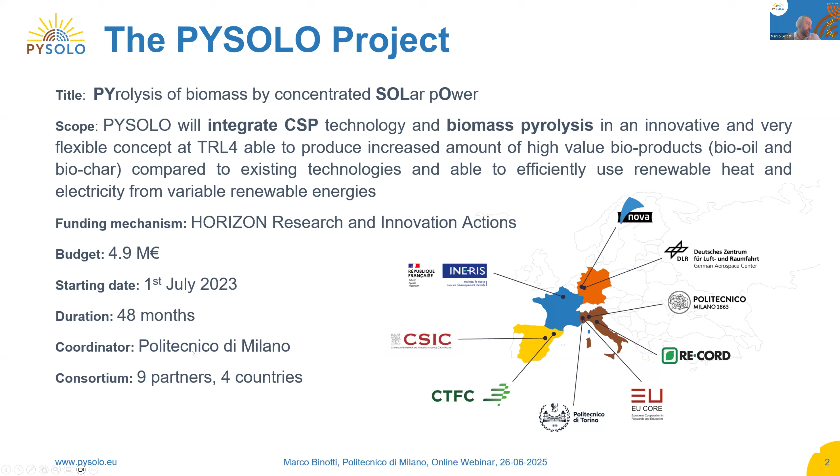My duty here is to provide the audience a short introduction about the PYSOLO project, and the framework for the subsequent talks, which will be very interesting about pyrolysis and solar concentrating systems. The PYSOLO acronym stands for Pyrolysis of Biomass by Concentrated Solar Power, with the scope of integrating CSP technology - concentrating solar power technology - with biomass pyrolysis in an innovative system, which I will show shortly. The project started about 2 years ago and will last 4 years, so we are halfway through, meaning we have started the experimental activity, as you will see. The consortium is made of 9 partners from 4 countries, as shown here, with coordination done by Politecnico di Milano.

So what's the idea under the PYSOLO project? Pyrolysis is a process in which you have thermal degradation of biomass in a temperature range between 250 and 700 degrees, in an environment without any oxidizing agent. The products of this degradation are bio-oil, pyrogas, and char - a liquid, a gas, and basically solid carbon. This process is endothermic, so it requires heat. How is the heat typically provided to this process? Basically, the biomass is dried, then you have the pyrolysis, and after the pyrolysis, you have separation - for example, of the solid carbon particles, the char, together with the particulate carrier. You have combustion, and the combustion of this char provides heat to the particles that finally provide heat to the pyrolysis system.

So this represents an inefficient step because we are using part of the valuable biogenic carbon produced just for combustion, with CO2 emission. Of course, it's carbon neutral emission, but in any case we are reducing the carbon efficiency of the process. Then what's the idea that moved us to the PYSOLO concept?

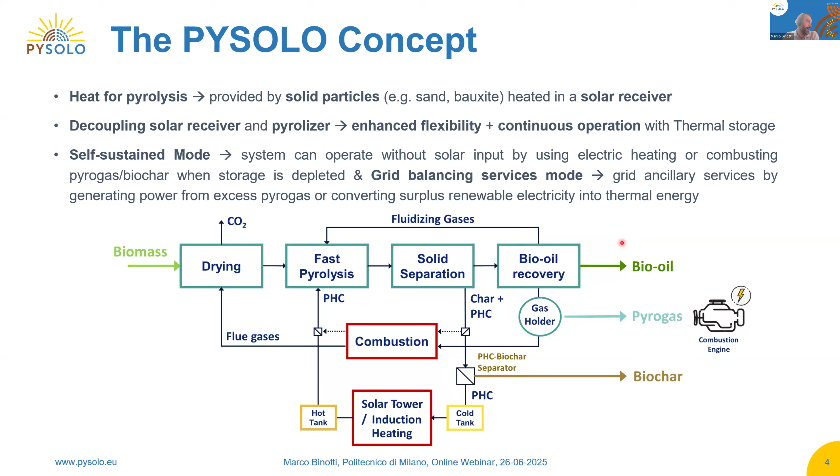And in case, pyrogas. So what we will do in the project, we will test different particulate carriers that should be optimized both for the operation on the pyrolysis and on the receiver side.

We will test the key components of the system at TRL4, which means that we are testing not the integrated system, but each system per se, but with an eye on the entire optimization of the system.

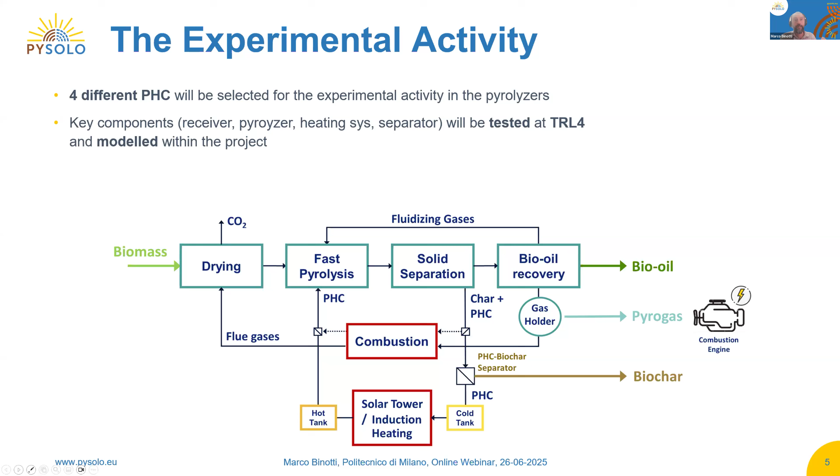In particular, we will test the auger and the fluidized bed pyrolyzer, two different pyrolyzers, in two sites at RE-CORD and CSIC. Then we will test the solar receiver at DLR. It's a rotary kiln type of receiver.

We will test the induction heating and the separation system. Of course, it's also important to separate the valuable product from the particulate carrier itself.

Apart from this experimental campaign, we will have, of course, modeling activity supporting each component's study and development. And we will have a system analysis at system level in terms of techno-economic assessment, life cycle assessment, and risk analysis that will be performed within the project.

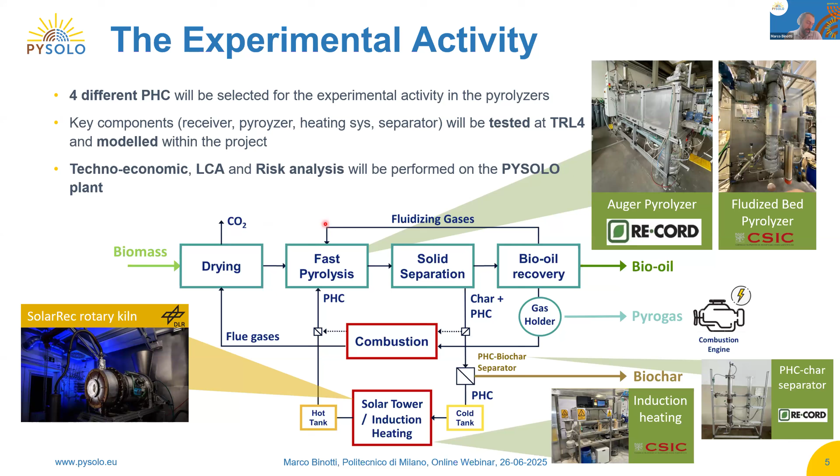So here it's briefly reported the objectives of this project. The objective is the validation at TRL4 of the solar pyrolysis process, demonstrating basically the key components, and then we have objectives for each of the components.

Objectives for the receiver in terms of operating hour and efficiency. We have a specific objective for the pyrolysis unit with specific target.

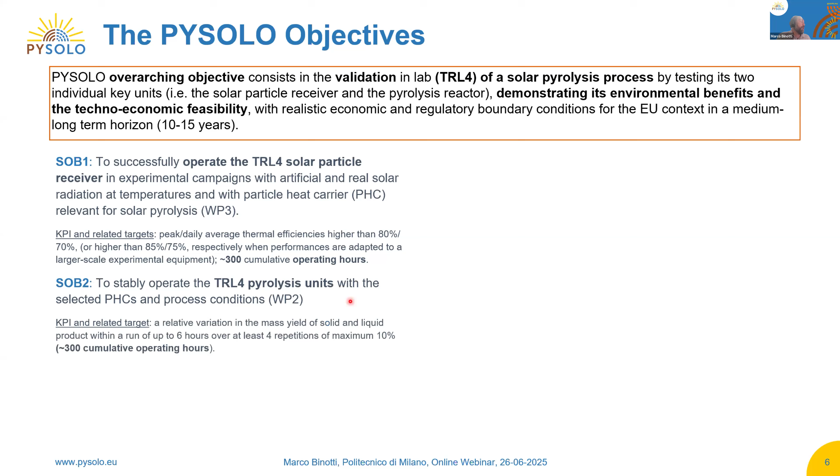We have objective for the particle char separator unit, for the induction heating with KPIs and target, and for the overall system analysis that are here reported, but I will not go into the detail of this as the presentation will be made available for you.

In the end, what we want to demonstrate is that this system is a full-scale system that can be a negative emission system on LCA basis. So not only carbon neutral, but given the fact that we are producing char, the overall carbon balance will be negative.

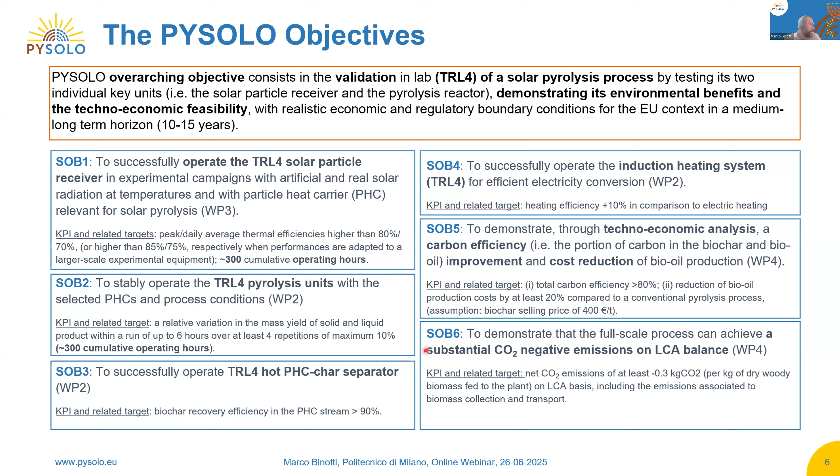That was a very short introduction because this was not the most interesting and relevant scientific part of the talk, which is, of course, part of the remaining webinar with all the experts from the PYSOLO consortium.

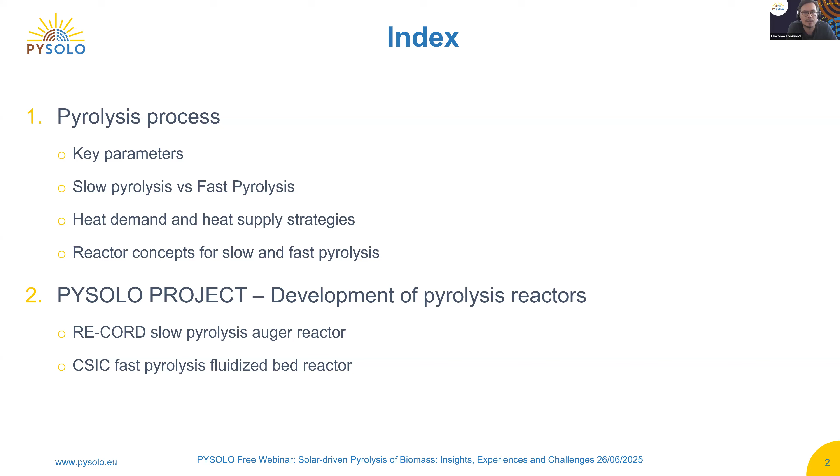Pyrolysis is a well-known endothermic process generally carried out in an inert or slightly oxidizing atmosphere, in a temperature range of 400 to 650 degrees. The main products are a carbonaceous solid, the biochar; a mixture of non-condensable gases, mainly carbon monoxide, carbon dioxide, methane, hydrogen, and other hydrocarbons with higher carbon atoms; and finally condensable vapors, a complex mixture of organic compounds originating from the thermal fragmentation of the biomass constituents, which when condensed form the well-known bio-oil.

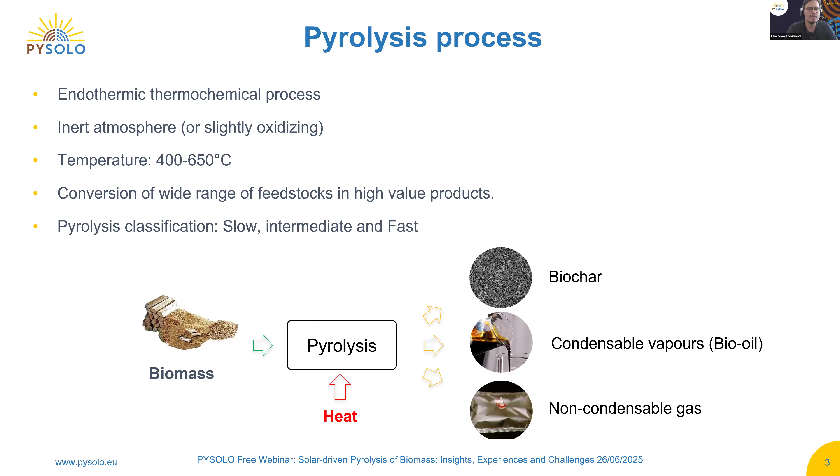Pyrolysis is generally classified into slow, intermediate, and fast pyrolysis according to the operating parameters. The most important parameters are temperature, the solid and vapor residence time, the heating rate, and biomass properties such as size, shape, and chemical-physical composition, and finally the moisture content, which affect the energy requirement for the process.

In intermediate pyrolysis, the heating rate is lower than in fast pyrolysis, and the residence time of the feedstock can be in the order of minutes. These operating conditions lead to much lower liquid yield compared to fast pyrolysis, and a higher yield of char and gas. In general, intermediate pyrolysis is adopted to balance the three co-products.

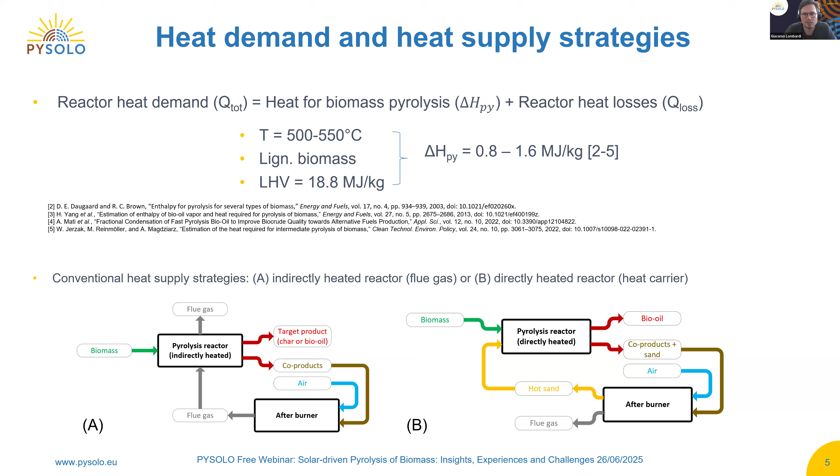The first method is generally adopted in slow pyrolysis, while the second is used in fast pyrolysis reactors. The most common fast pyrolysis reactors are bubbling and circulating fluidized bed, the rotating cone, and the directly heated auger reactor. The essential characteristics for such reactors are very rapid heating of the biomass, an operating temperature around 500 degrees, and rapid quenching of the produced vapors.

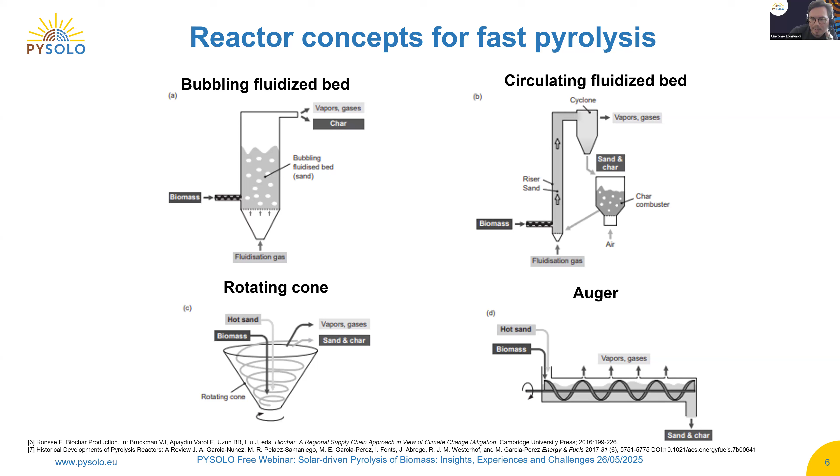In most of these systems, heat is internally provided via a solid heat carrier. The intensive mixing of biomass and heat carrier intensifies the heating rate, which leads to very high bio-oil production, up to 70%. In general, fast pyrolysis systems require small size biomass to match the heating rate required for bio-oil production.

Slow pyrolysis is applied from rudimentary batch kilns up to continuous industrial systems. In general, slow pyrolysis reactors tend to be simpler compared to fast pyrolysis reactors, since they are generally carried out with slow heating rate and high solid residence time.

Nowadays, traditional kilns have been replaced by continuous industrial reactors such as retort, auger, and rotary kiln. Retorts are indirectly heated fixed bed reactors designed to handle wood logs and are not suitable for small size biomass such as agricultural and forest residues. Whereas rotary kilns and auger reactors are continuous moving beds that are less sensitive to feedstock characteristics, making them suitable for all markets, from biochar production up to charcoal production.

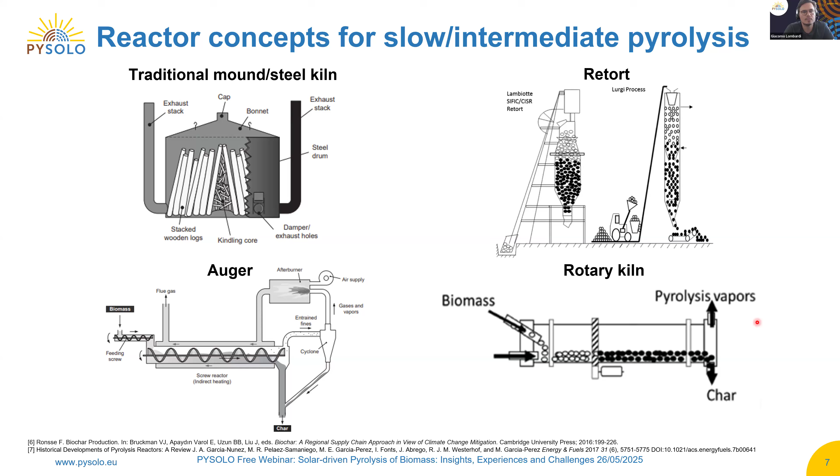Within the PYSOLO project, in particular within Work Package 2, RE-CORD and CSIC developed two different pyrolysis reactors to match the objectives of the project. RE-CORD developed a slow pyrolysis auger reactor, while CSIC developed a fast pyrolysis fluidized bed reactor.

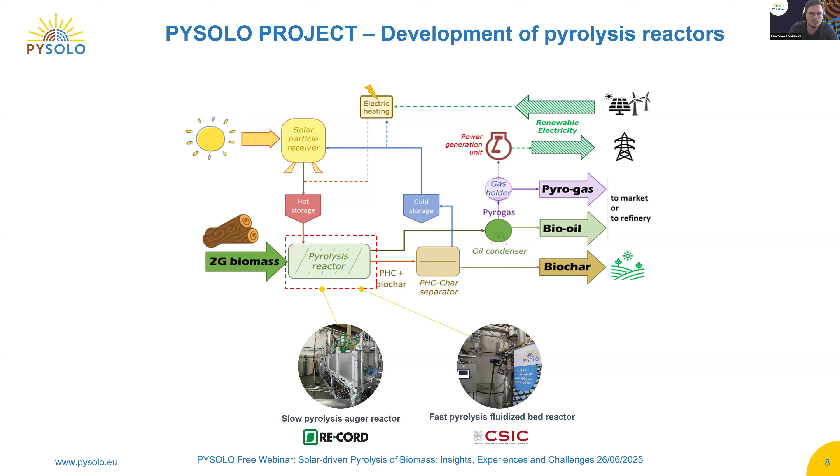With regard to the RE-CORD slow pyrolysis unit, it is based on auger technology, which is one of the technologies less sensitive to feedstock type, making it suitable to convert non-homogeneous material such as prunings, agricultural and forest residues.

This specific pilot plant has been designed for a feedstock feeding rate of around 1 to 5 kilograms per hour and a heat carrier to biomass mass ratio within 3 to 9. The max operating temperature is around 650 degrees, and the solid residence time can be within 5 to 60 minutes by varying the rotational speed of the auger.

So this type of plant is really a flexible unit that lets us investigate all the operating parameters in this reactor. The process heat is supplied via the feeding of the heat carrier, which is heated within an electrically heated vessel, while heat losses are compensated by electric heaters located along the reactor cylinder.

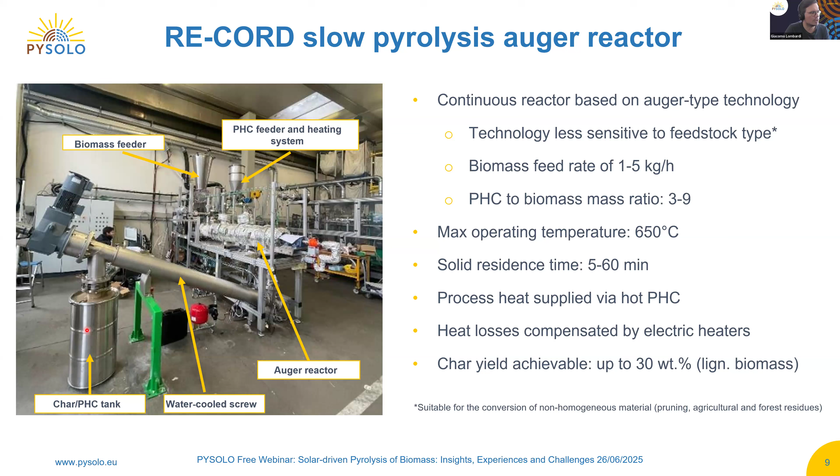The screw reactor performs the inert pyrolysis by introducing also nitrogen as purge gas. The rotation of the screw allows the biomass to be heated along the reactor, and finally the solid, the mixture of char and heat carrier, is collected at the outlet of the plant, cooled by means of a water-cooled screw, and then collected for safety storage into a stainless steel vessel.

Whereas the pyrolysis gases are withdrawn from the reactor and cooled and condensed into a condensation unit that is basically made up of three surface heat exchangers followed by an electrostatic precipitator for the collection of aerosol.

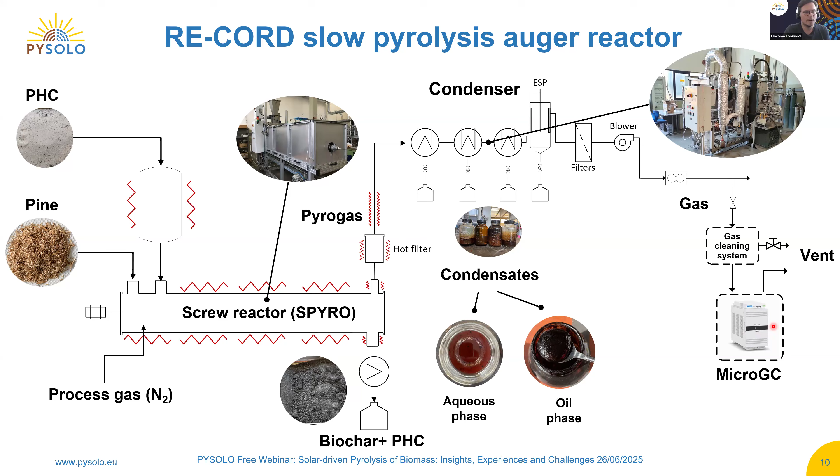Finally, I would like to point out the main challenge for such a reactor. In order to use the char for agricultural purposes and to recirculate the heat carrier back to the solar receiver, a separation unit is needed to separate the produced char from the sand.

Within the PYSOLO project, we are developing a unit that will allow us to separate these two fractions, so we will collect the char and the heat carrier separately. This type of unit is based on fluidized bed technology, so by means of the injection of a fluidization agent, we will be able to segregate the char on top and the sand on the bottom, which will be collected separately.

And this separation unit will be tested with the previously generated solid from the pyrolysis reactor.

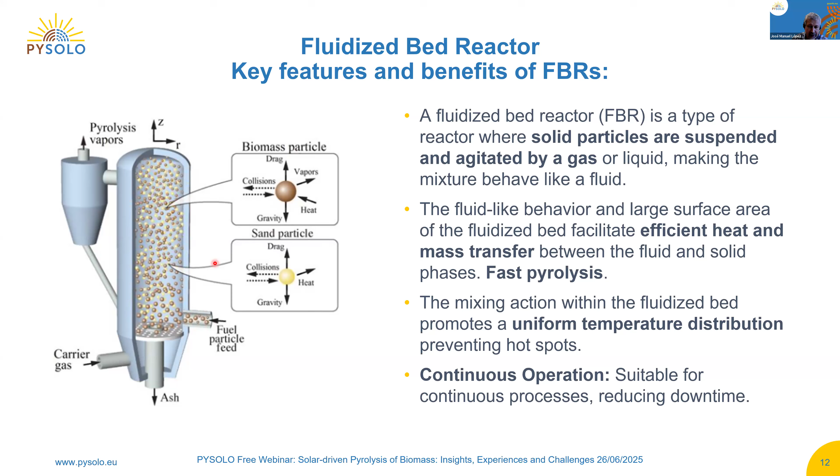This fluidization behavior depends on different key parameters. The main one is the minimum fluidization velocity, that's the superficial gas velocity at which the solid particles start to suspend and behave like a fluid.

It can be calculated by a theoretical equation, the Ergun equation, that takes into account different properties of the solid and the fluid, but it can also be calculated experimentally, that I will show later in our reactor.

Depending on the superficial gas velocity, we can start from a minimum. When we reach the minimum fluidization, we have a smooth fluidization regime. And if we increase that gas velocity, we will start to have different regimes like the bubbling fluidization, slugging, and turbulent.

The last one is when you have too much velocity, so the solids undergo pneumatic transport outside of the reactor, and you have to develop different collection systems to recover the solid.

In our case, we are working in the bubbling fluidization regime, which is one of the best in terms of performance for mass and heat transfer.

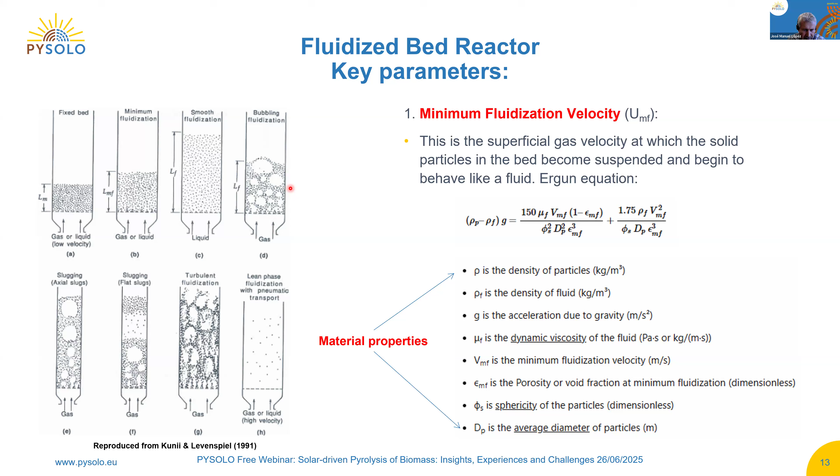If we move to the next slide, we will see the next key parameters we have to take into account. It is the pressure drop inside the reactor, which depends on the weight of the particles and the void within the bed. One engineering point that has to be very well designed is the distributor plate.

That's the plate that is going to distribute the inlet gas or liquid, and it needs to provide a uniform gas distribution to prevent the formation of slugs and channeling inside the bed of the reactor.

And also the reactor geometry. In that part, one design point that must be taken into account is the freeboard, the section above the bed, just to prevent particle elutriation. We need that space to avoid the entrained flow carrying particles out of the reactor.

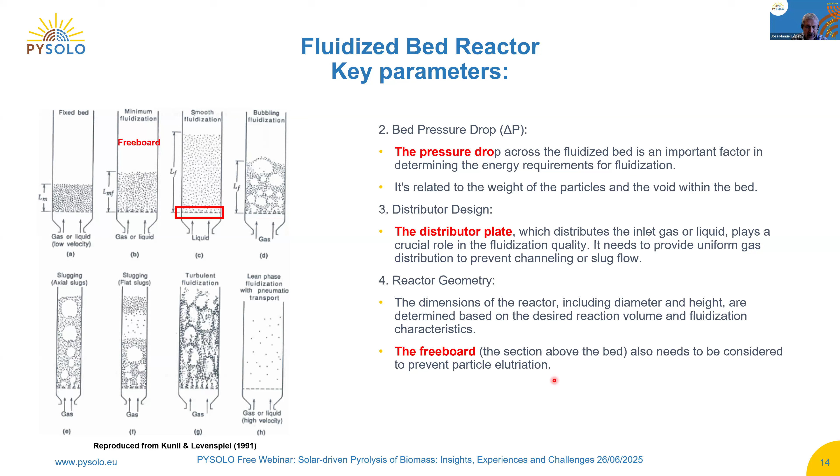This kind of reactor is widely used in the petrochemical industry, for example for fluid catalytic cracking and hydrocracking, and in waste treatment, in incineration or gasification of waste materials, and also in power generation.

The main disadvantages, compared with other technologies, are the high capital cost, because they have a higher initial cost compared with other reactor types.

The erosion and attrition processes that the particles of the bed can suffer, so we need particle recovery systems, and also the complex design and operation.

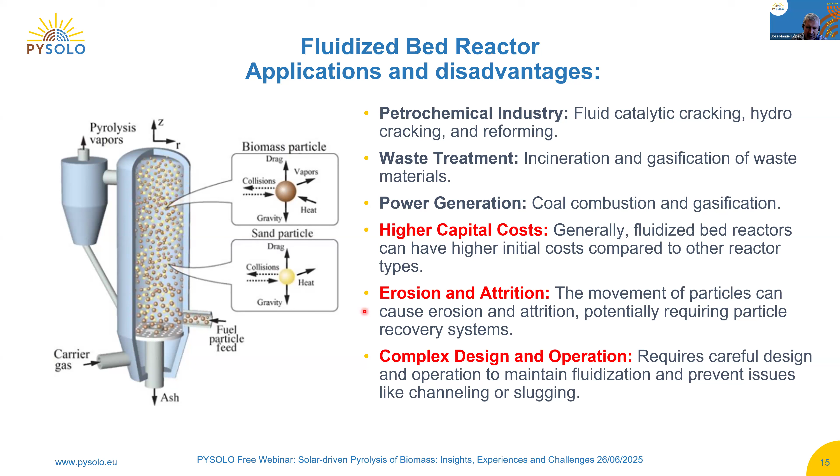In the next slide, I'm going to show you the CSIC fast pyrolysis reactor. In this one, you can see a diagram showing the different parts of the reactor. We have the dense zone where the bed is located, that is 20 centimeters high.

Then we pass the fluidization gas, in our case nitrogen, preheated before going inside the distribution plate, and then we can transform this fixed bed into a fluidized bed with a riser of 100 centimeters, just to allow the particles to interchange, to produce the mass and heat exchange.

And also to ensure that most of the particles do not pass through to the condenser. In the condenser, we condense the condensable gases, and we get the pyrolysis oil that you can see in the picture.

Also, in the part that separates the dense part of the bed and the riser, we have an overflow to recover the biochar and the heat carrier. We have two feeders, a biomass feeder for the fuel, and a PHC feeder for the heat carrier.

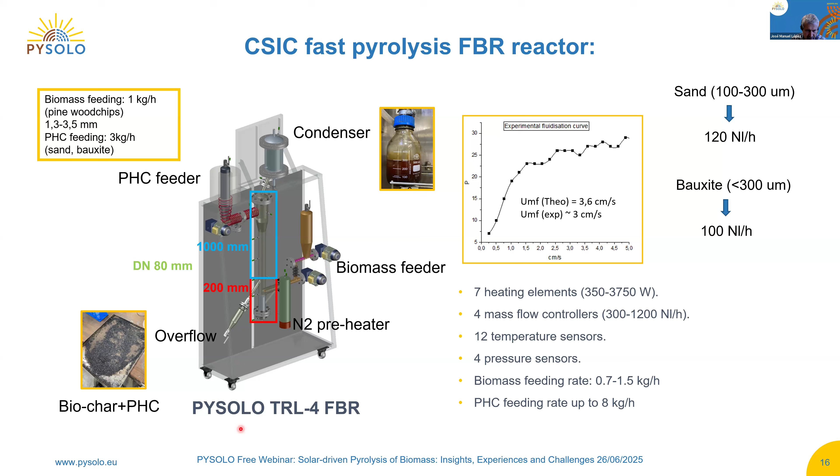In the next slide, I will show you the real picture of the instrumentation of the pilot plant and the challenges or key parameters that we are studying, trying to maximize the conversion of products and the yield in bio oil production. That's in our case in the fast pyrolysis.

We are going to try three different process temperatures, from 450 to 550. Also, the way that we are feeding the heat carrier: in a high flow rate with a low temperature difference between the pyrolysis and the heat carrier, or in the reverse way, using a low flow rate but a high difference of temperatures. That also can have an influence on the properties of the conversion products.

Also, using different fluidization velocities, we are also changing the gas residence time, minimizing the residence time just to get the maximum bio oil yield, and of course the type of heat carrier.

We are using at the moment sand and bauxite, but one of the key points is also trying to use calcium oxide and biochar, because they can have catalytic properties in the process, so we can change the composition of the bio oil. In my next presentation, I will talk a little bit more about the challenges of the composition of the bio oil that we are getting from lignocellulosic biomass.

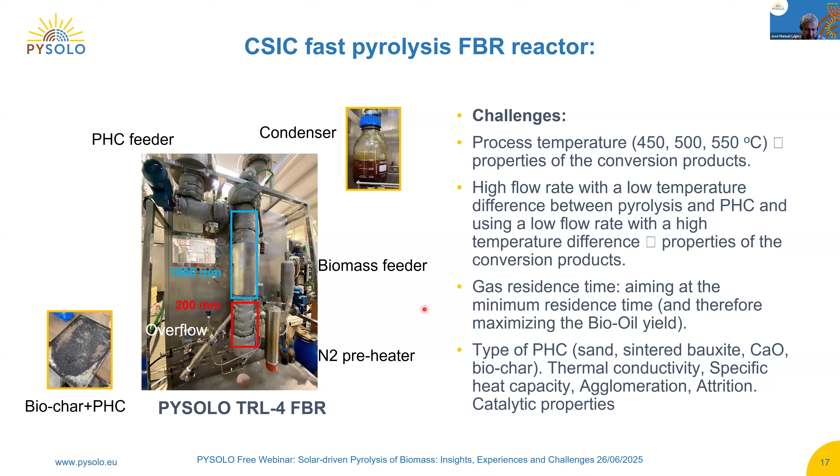I would like to thank all the partners in the PYSOLO project, and we are ready for any questions. Thank you.

There was a question, and I think Marco already wrote an answer, but I will read it for you to contribute.

I have a question regarding the energy balance of solar-assisted pyrolysis systems. As Giacomo mentioned, pyrolysis is an endothermic process requiring an external energy source to sustain the reaction. Has your team conducted a detailed energy balance analysis for the system? Specifically, how much of the required energy input is effectively supplied by the solar resource, and how does this influence the overall system efficiency or energy yield? Are there any data or insights on the thermal efficiency or solar conversion performance? Would be greatly appreciated. You can see the question too, right, Giacomo and José?

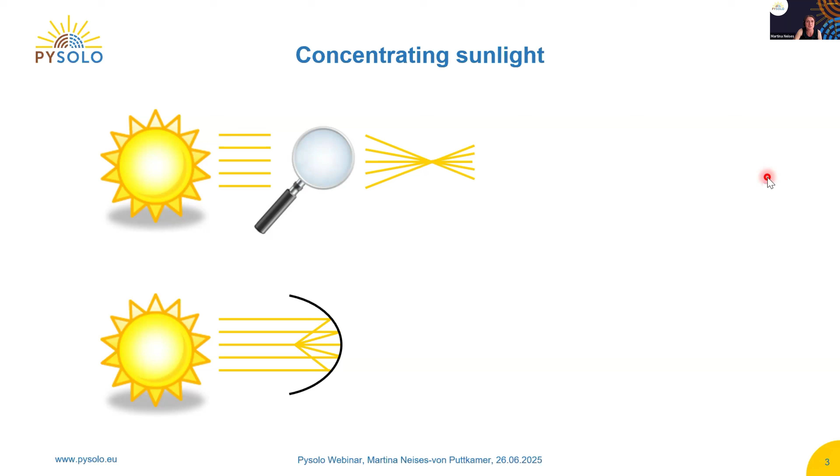So let's get started. The concept of concentrating sunlight is actually very simple, and you all know it from school, from physics education. You can concentrate sunlight with concentrating optics, which can be a lens or a curved mirror. These concentrating optics create a focal point, and at the focal point it gets hot. So what happens when we concentrate sunlight? Basically, we increase the energy density, and by increasing the energy density, we can increase the temperature. Depending on the degree of concentration, you can reach temperatures up to 1000 degrees Celsius or even higher. It gets more complicated the higher your desired temperature is, but in principle that's the theory.

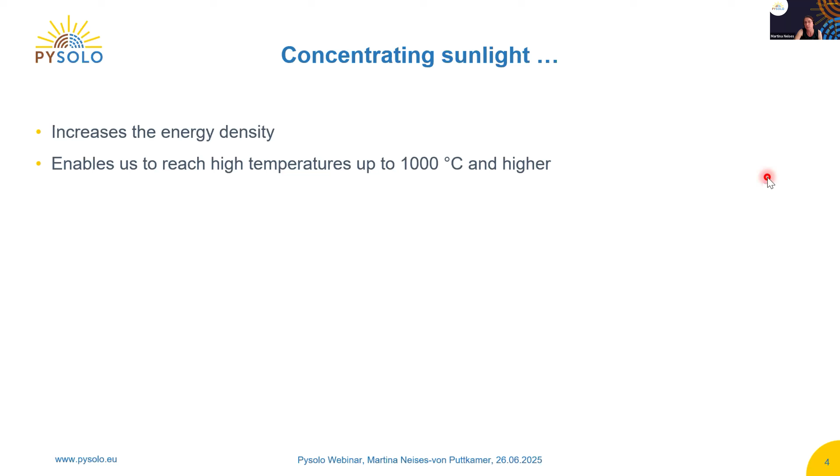There are different types of concentrating technologies. They all have some components in common. The first is they all use mirrors to redirect and concentrate the solar rays. Very important for us working with concentrated solar technologies - we can only focus and concentrate the direct solar irradiation, so all other irradiation is not useful for us. The mirrors focus the irradiation, and then at the focal spot we typically place a component we call an absorber or receiver. As the name implies, it absorbs the solar radiation. The third component is usually a heat transfer medium to take away the energy and make use of it. The heat transfer medium can be a gas, a liquid, or even solid, as we will see in the presentation.

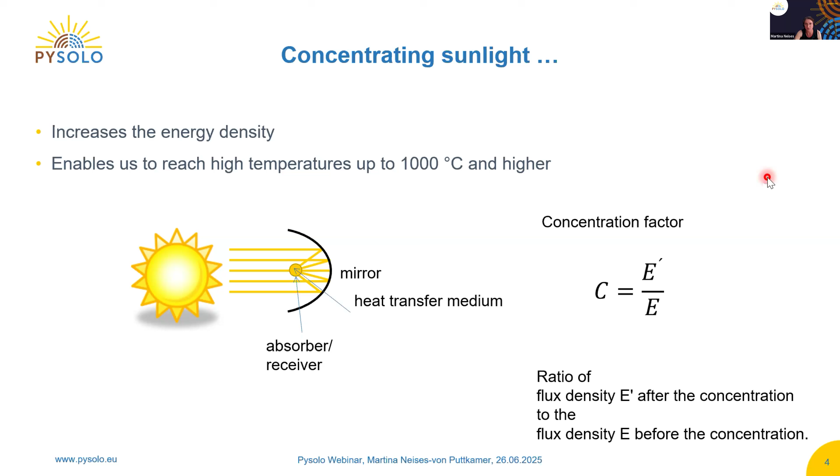One very important parameter we use to describe these concentrating systems is the so-called concentration factor. It is the ratio of the flux density after concentration to the flux density before concentration, and it is directly connected to the temperature. To keep it simple, the higher the concentration factor, the higher the temperature you can reach.

So these systems we call point focusing systems because they actually create a focal spot. The concentration factors here are much higher compared to the line focusing systems. The solar tower can reach concentration factors of 1000, and the parabolic dish can go even higher due to its special design.

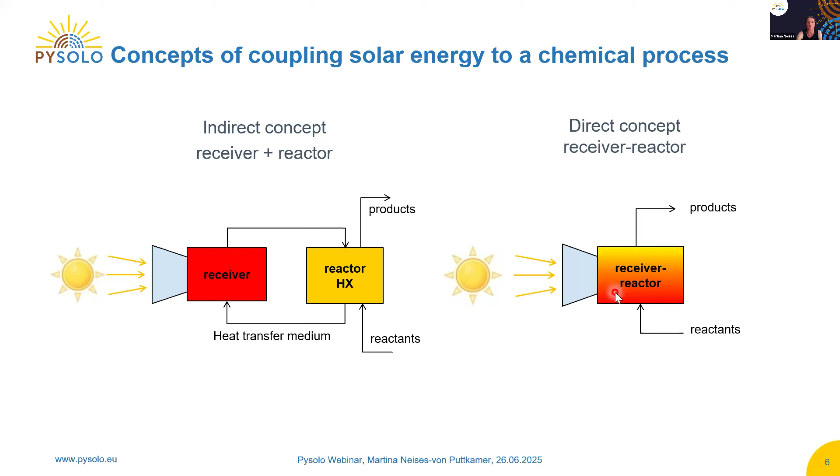Now you can imagine both concepts have their pros and cons, and for the individual application you're looking at, it's not always so easy to decide which system to use in the end. So what do we do when we want to decide looking at a specific application?

First of all, we ask the question, what concentrating system can I use? The first parameter you look at, of course, is the temperature. Roughly, if you want to operate your application above 600 degrees Celsius, you have to go with a point focusing system, so often we choose a solar tower, for example. But it also depends on other parameters, such as the size of your plant, or the amount of product or material you want to treat. So there are a lot of parameters coming into play when you decide on the concentrating system.

And then the next question is, how can I connect the concentrating technology and the chemical process? Here it's important to look at the actual chemical reaction you're targeting. What is the temperature range and what is the pressure range that it needs to be operated at? What are the reactants and materials involved? For example, are there special gases?

What are these materials? Do I need to include a catalyst into my system? And then you have to ask, can I operate an open system, or does it have to be a closed system? And what is the process operation I want to have in the end? Do I want to operate continuously, or am I looking at a batch process? And then in the end, you can think about the different concepts and ideas of what the reactor or receiver reactor can look like.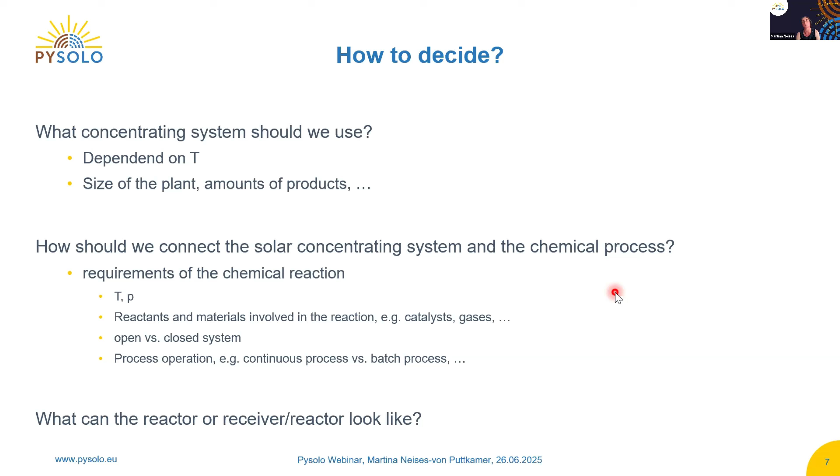Now we look a bit more into detail in the pyrolysis reaction. We already heard that the pyrolysis reaction is operated in inert atmosphere. This is very important, meaning we need to operate in a closed system, and it has to be gas tight. We also already heard about the reactants and products: the reactant is biomass, and the products are biochar, bio-oil, or gas. The temperature range depends very much, but it is between 300 and 900 degrees Celsius, and here we are looking at operation at atmospheric pressure.

So now we have these prerequisites, and you can play around a bit and create ideas of how your system can look like. Let's think about a direct solar receiver reactor. In this receiver reactor, we would have the biomass entering here, the reaction taking place inside the receiver reactor, and then the biochar, oil, or gas exiting the reactor.

In this concept, we would need some kind of window to close the whole receiver reactor, because we learned we need to operate in a closed system and make sure no air comes in and disturbs the reaction. So we would close the system here with a window. These windows are usually made out of quartz.

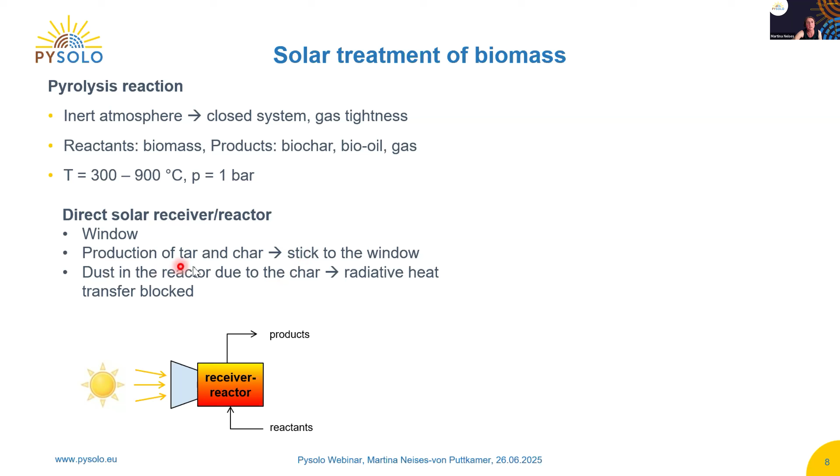Now when we think about our pyrolysis reaction, we produce tar and char, so there's a risk these products stick to the window. Where they stick, they can create hot spots, and then the window would break. The moment it breaks, you can pretty much shut down the whole system, because your system is not gas tight anymore. So this is a very high risk. Also, the creation of dust in the reactor due to the char risks blocking the radiative heat transfer.

Keeping this in mind, let's think about an indirect concept where we have a receiver operating with an inert heat transfer medium and a separate chemical pyrolysis reactor. From a thermodynamic and heat transfer point of view, it's clear we need to operate the receiver at a higher temperature than the chemical reactor, because there will be energy losses along the way. Thermodynamics says the temperature in the receiver needs to be higher than the temperature in the chemical reactor, so we need to account for this.

Also in this system, the tar might deposit on the inner surface of the chemical reactor, which might reduce the heat transfer. The good point about this concept is that here we can possibly include storage into the system. You can think about putting storage tanks on the cold side as well as the hot side, and these storages give you the possibility to operate the system even after the sun has set.

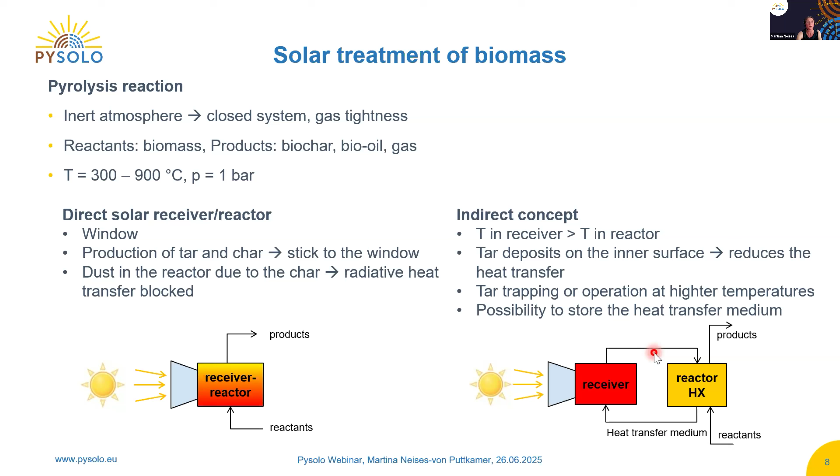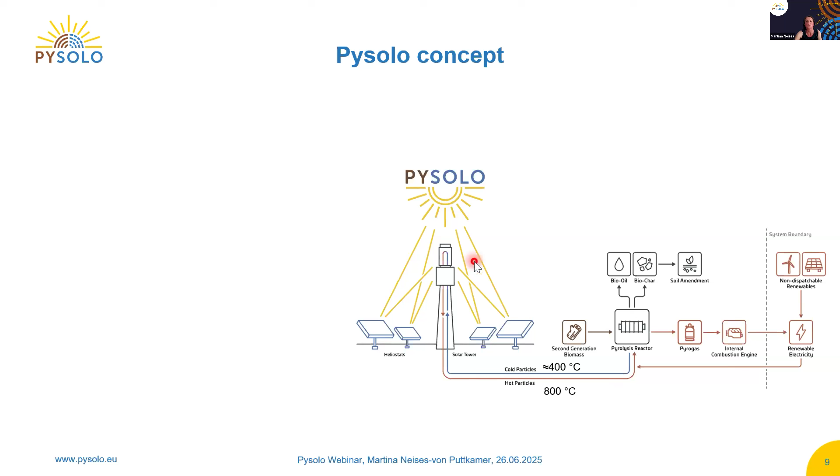So now, as you already learned, for the PYSOLO concept we decided to go with this indirect system for several reasons. Basically, this is how the concept looks like, as you've already seen. Our part now is to focus on this solar part. We will design and test a solar receiver that will be operated with a particulate heat carrier.

There has been intensive work from my colleagues to investigate and characterize many different possible particulate heat carriers, such as olivine, bauxite, silicon carbide, and sand. I will not go into any details now, but if you're interested, there are already publications available that we would be happy to share with you to see how these different heat carriers compare to each other.

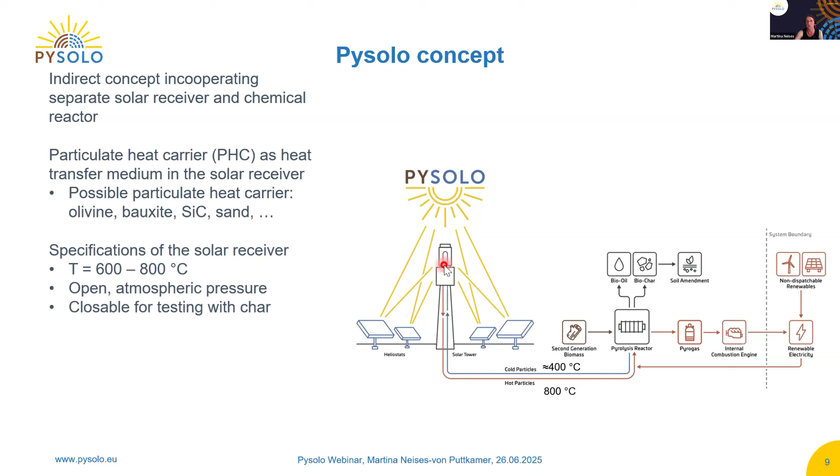So here our receiver that will be placed later on, when we think about the pilot plant on top of the solar tower, the cold particles will enter the solar receiver. The receiver is designed to operate in a temperature range up to 800 degrees C. As we use an inert heat transfer medium, we are able to operate open under atmospheric pressure, basically under air. Only for some tests we designed it to be closable, but this is just for the project, and will not be the case later on for any pilot plant application.

In this system, it's important to consider that we have 3 more components to take care of. The first is that we need to transport our particulate heat carrier. The second component is the storage system - as I said, there can be a cold storage tank and a hot storage tank to be more flexible and independent from the actual sun's irradiation. The third component, very important in the pyrolysis reaction, is the particle air separator, because the pyrolysis reaction needs an inert atmosphere, so we need to make sure no air enters our pyrolysis reactor. We are specifically designing this particle air separator to make sure the air exits the system before the particulate heat carrier enters the chemical reactor.

Now, what is the idea of the solar receiver in the end? The concept itself is actually quite simple. We decided to go for a solar heated rotary kiln. A rotary kiln is a concept used widely in the chemical industry, and we adapted it to run with concentrated solar irradiation.

In this concept, we have a drum that rotates. The particulate heat carrier enters on one side, and once it enters, it is mixed, and at the same time moves through the kiln. It is irradiated with concentrated solar irradiation and heated up while it moves through the kiln. Then at the end of the kiln, it exits again, and the whole journey continues - we go to the particle storage, then the particle air separator, and finally the heat carrier enters the pyrolysis reactor, and then the whole cycle starts again.

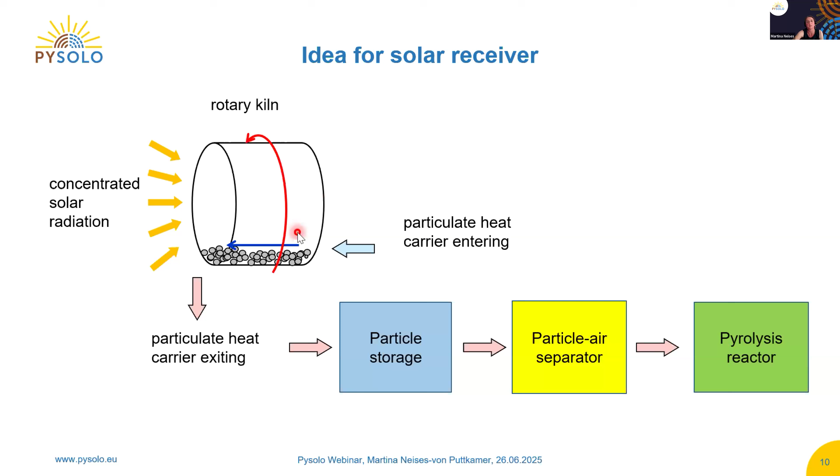This is the first concept or drawing of our idea of the solar rotary kiln. We are actually now finishing the design phase, so at the moment I can only provide you with some first designs. Next year, hopefully we can show some actual pictures of our receiver in place.

In principle, the receiver or the whole system is divided into 3 components. The first is the particle feeder - here the cold particles enter, and then they are fed into the actual rotary kiln. This part is the one that rotates. The particles move through the rotary kiln, and then here at the end is the third component, the particle collection. The concentrated solar radiation enters through the open aperture, hits the walls as well as the particles here at the bottom, and through diverse heat transfer mechanisms, the particles are heated up to about 800 degrees Celsius.

The diameter of this outer shell is 560 millimeters, and the whole receiver is designed to operate with 15 kilowatts on aperture - that means 15 kilowatts entering into the receiver. Now, you might wonder about the rotational speed, the speed that the drum will rotate. This will be part of the testing, to adjust the rotational speed so that the residence time of the particles is long enough to guarantee they can heat up to the desired exit temperature.

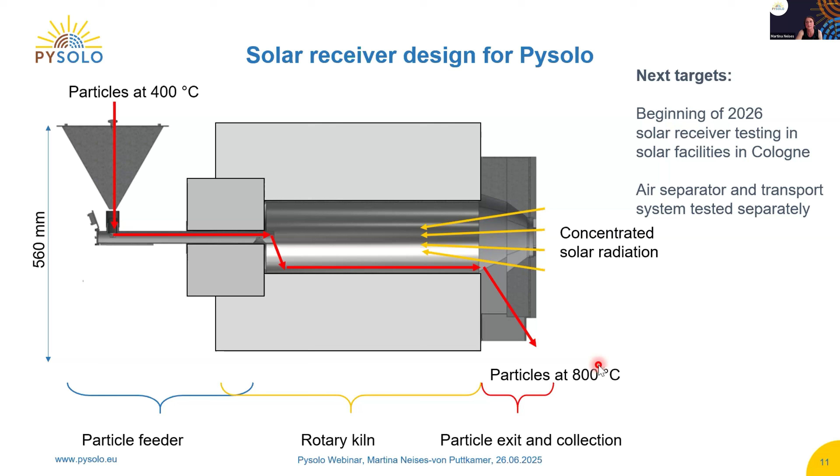Now I will end by giving you a little insight about the test facilities we have available at DLR in Cologne that we will use in the course of the project. The first test facility is our solar furnace - this is a test facility specifically designed to create high concentrations for testing any kinds of applications you might think of.

It consists of a heliostat, which is basically just a big plane mirror. The heliostat redirects the irradiation and it hits a so-called concentrator. This concentrator is composed of more than 100 small curved mirrors that redirect and concentrate the sunlight into the building. Behind this opening is an experimental room where the receiver will be placed, and it can also be connected to all the necessary auxiliaries.

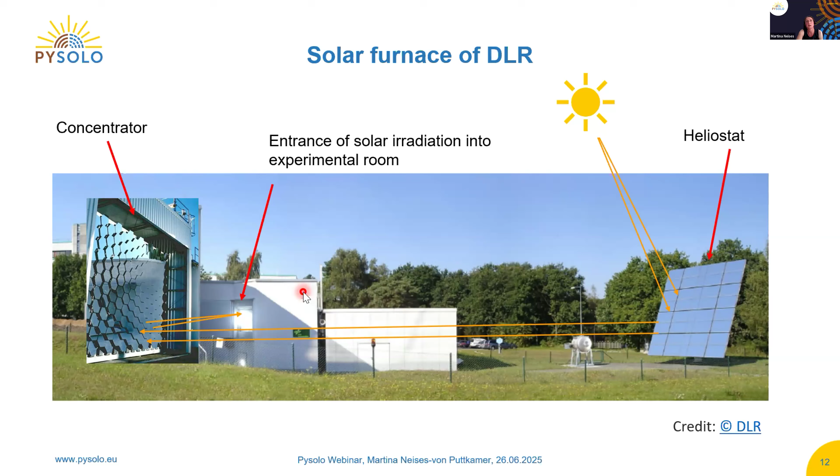So this is our facility where we use actual sunlight. We also have a facility we call the solar simulator, and as you might imagine from the name, here we simulate the solar irradiation to be able to operate more independently from the actual sun. We are here in the west of Germany, so having really good sunny weather conditions is not always easy. That's why we decided to also have this solar simulator for operation and testing of our components.

The solar simulator works with xenon arc lamps, and the light of these lamps is very similar to sunlight, meaning they have a spectrum very similar to the actual sun. This is important if you want to simulate the sun - you have to make sure your light source has a similar spectrum. The light of the xenon arc lamps is redirected and concentrated by curved reflectors, and here in the solar simulator we have 10 of them. The light is concentrated onto a focal spot, and here we can place our experimental setups.

Here in the picture, you can see a particle reactor that was tested some years ago in the solar simulator of DLR. Now I will end by giving a summary and a bit of an outlook.

We saw different concentrating solar technologies that can provide different temperature ranges with temperatures higher than 400 degrees Celsius. We saw that we can connect them in different ways to a chemical reaction. And we also saw that in the PYSOLO project, we will have a solar receiver operated with a particulate heat carrier that will then be connected to the actual pyrolysis reactor.

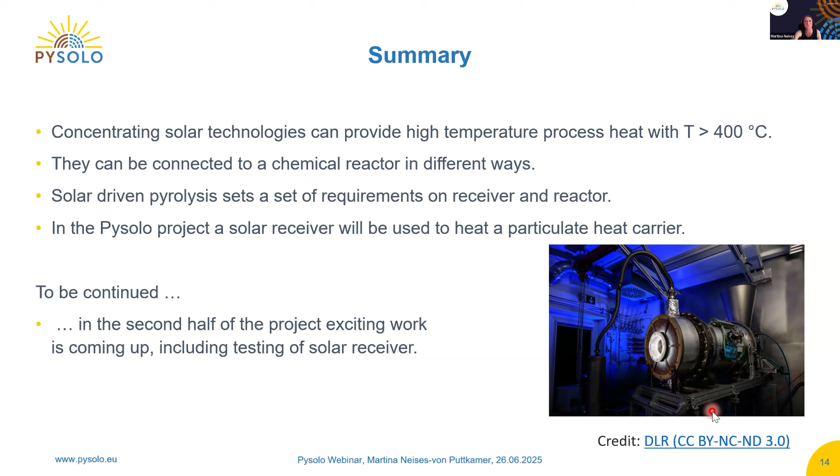We are very excited and looking forward to next year because a lot of exciting work is coming up for us, especially the testing of all our components, the solar receiver and so on in our test facilities in Cologne. This is a picture of another rotary kiln that was designed and tested for a different kind of application. But I hope next year we will be able to show you an updated picture with our functional solar receiver that we tested in the course of the project. So with this, I end, and I'm looking forward to your questions.

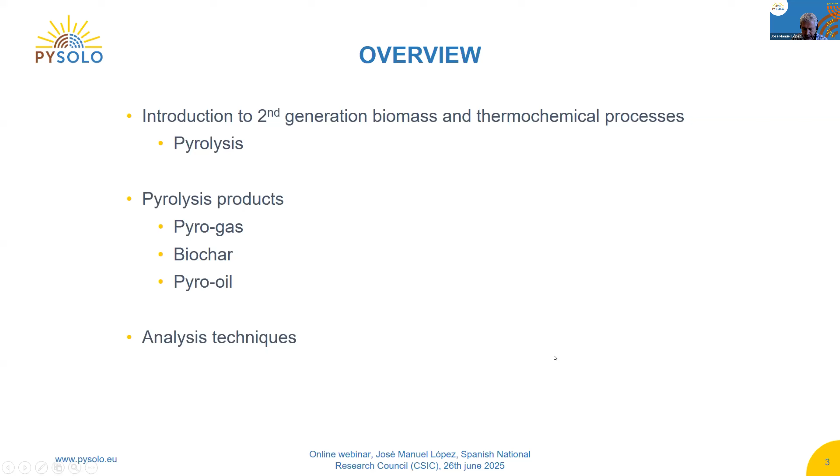So why are we using second generation biomass in the PYSOLO project? That's because we can reduce the food competition - this is second generation biomass, not using food sources. Also we are promoting the circular economy, because we can convert agricultural, forestry, or even urban organic waste into valuable energy resources. It also has environmental benefits - we're reducing greenhouse gas emissions, and it has the potential to develop a biorefinery based on the products we can get from the biomass.

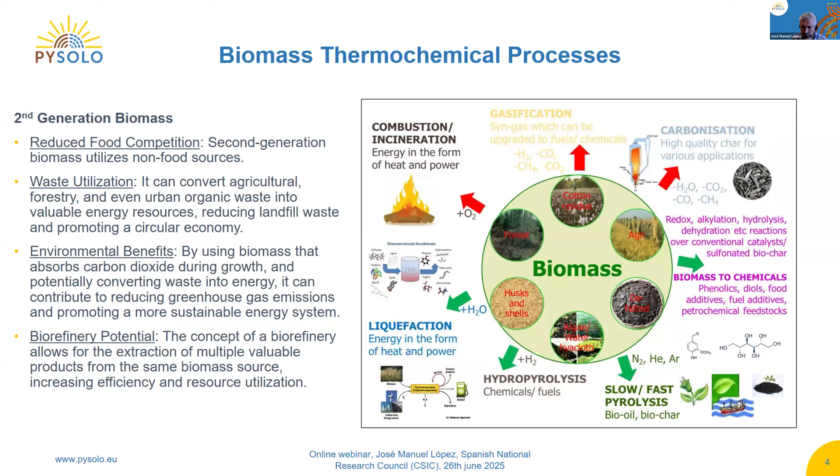Also the slow or fast pyrolysis, which we will go deeper into in the next slides. And carbonization, aimed at getting a high quality char, more for the solid product, which is more similar to a really slow pyrolysis. And of course gasification, where you are looking mainly for the gas byproduct, a syngas that can be used to produce different chemicals or fuels.

Pyrolysis is the thermochemical process we are studying in the PYSOLO project. What are the parameters that influence the products we get - the bio oil, the biochar, and the gas - and also the composition, not only the yield of the products but also the composition. Of course the first thing to take into account is the feedstock.

We are using lignocellulosic biomass, which is mainly composed of two polysaccharide polymers, cellulose and hemicellulose, and another biopolymer, lignin, which is mainly based on aromatic alcohols. The problem with this heterogeneous composition is not only the different behaviors and properties of the polymers, but also the high concentration of oxygen. This is one of the main differences when you look at the oil you get from biomass compared to the oil you get from a conventional fuel.

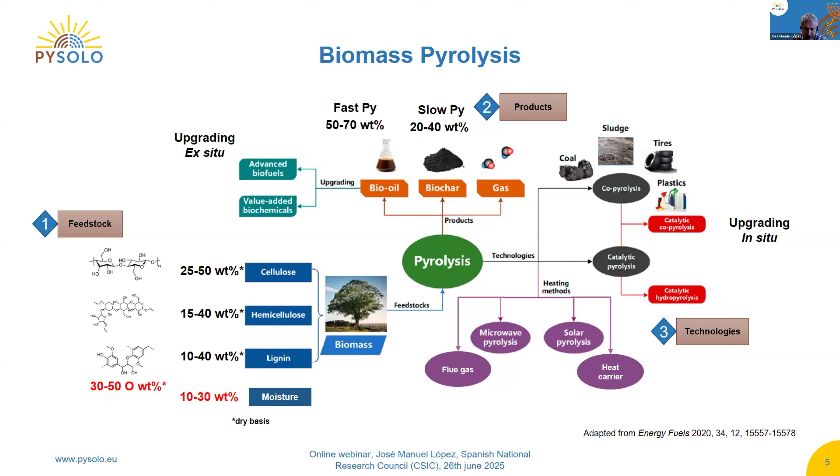Why is this important in the PYSOLO concept? Because as we have seen through the previous presentations and the project presentation, we want to increase the product yield, so that most of the time we will not need to use the pyrogas or the biochar to get heat for the process, as we are getting the heat from the solar particle receiver and using heat carriers. In this way, we can maximize the added value products that we get.

So mainly we are focusing on the biochar and the bio oil, because the pyrogas is going to be used mainly to get electricity in a combustion engine. In this way, we increase the carbon efficiency and reduce the CO2 emissions.

But to accomplish these objectives, we need to properly characterize the composition of the three products that we are getting, so we can decide if they can be used for market and refinery or not. It depends on the composition.

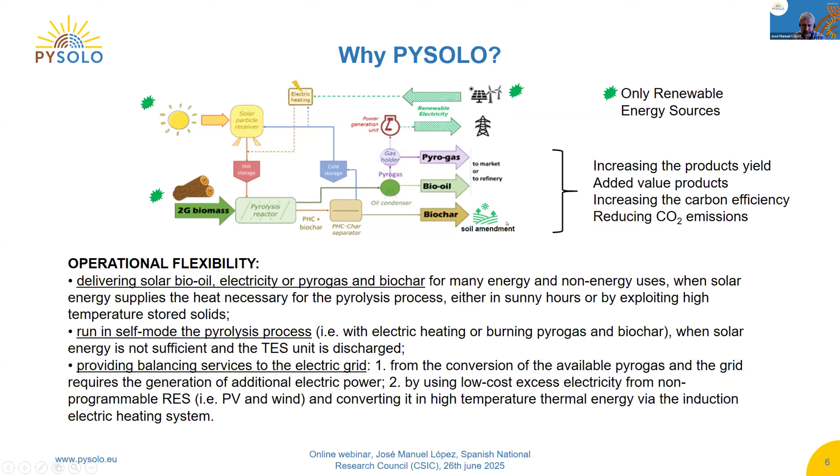The three different byproducts that we get from pyrolysis are, as we have been talking during these presentations, the pyrogas, the bio oil, and the biochar. Starting with the pyrogas: it's non-condensable gases mainly composed of carbon dioxide, carbon monoxide, hydrogen, methane, and other light hydrocarbons, and in really small amounts, heavier hydrocarbons and ammonia, sulfur and nitrogen oxides.

The composition of this pyrogas is going to determine the possible applications. The low heating value of the pyrogas is lower than natural gas, because the main products in the pyrogas are CO2, CO, and less hydrogen and methane than in natural gas. But in any case, with this composition, we can still use the pyrogas for heat or electricity production in a gas combustion engine. It can be used directly or co-fired with coal, for example.

We can try to change some pyrolysis parameters to increase the composition, maybe adding a small amount of oxygen or hydrogen to the process to increase the hydrogen and methane content. Depending on the CO and hydrogen ratios, we can use it also as a syngas to produce biofuels. But in the conventional pyrolysis process, the main application of this pyrogas is to be burned to get process heat.

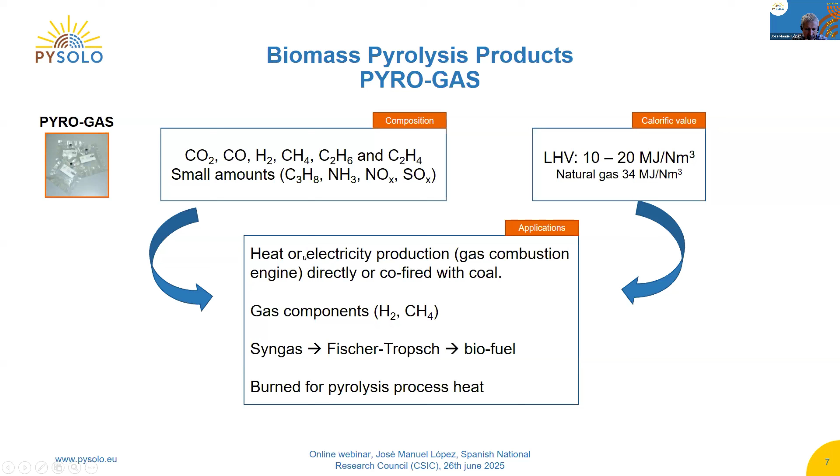In the PYSOLO project, it will be used for heat or electricity production. In the case of the biochar, it's mainly carbonaceous residue, with the main component being carbon, up to 96%.

It can also have some unconverted organic solids and a mineral fraction. That mineral fraction is very important to know, because if we want to use the biochar as a soil amendment or for carbon sequestration, in the case of soil amendment we need to know the amount of macronutrients that can still be in the biochar coming from the feedstock, from the lignocellulosic biomass, like nitrogen, phosphorus, potassium, calcium, magnesium, or sulfur. And we can also find some micronutrients that are useful for crop development.

Its main composition is carbon. It has a high heating value, similar to coal, so it can be used for fuel applications, as it was mainly used, or burned, to get pyrolysis process heat. That is the main use of this biochar in the case of conventional pyrolysis.

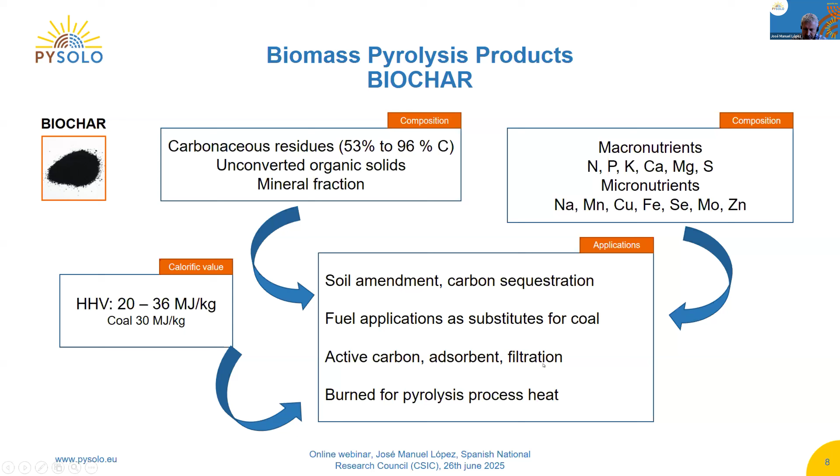But in PYSOLO, we are going to use it mainly for soil amendment and carbon sequestration. Also, due to the development of surface area during the pyrolysis process, we can use the biochar as a precursor for activated carbon, which can be used as an adsorbent to remove pollutants from air currents or gas fluids, and also for filtration in water treatment.

In the case of the main product we get in fast pyrolysis, for example up to 65% of the bio oil, this is the most challenging product of biomass pyrolysis, because it's a big mixture of up to 500 or more compounds, mainly oxygen compounds. That means acids, alcohols, ketones, aldehydes, phenols, etc., with much smaller amounts of alkanes and aromatics than if you compare with diesel or gasoline fuel.

We also have water, not only the water present in the feedstock, but also water produced during the pyrolysis process. If we go deeper into the composition of the bio oil, we can find up to 30% water, mixed with a high oxygen content that can be up to 40%. This makes the heating value of the bio oil low compared with fuel oil.

It's about half the value, and it also makes the bio oil non-mixable with conventional fuels. Due to the acids present, we also have a low pH and a high total acid number, so we can find problems of corrosiveness, not only in our facilities but also afterwards in the refinery. Also, due to the oxygen content, we have poor stability, and we can still have polymerization reactions during storage of the bio oil. And as I mentioned before, we have low aliphatic and aromatic content in the bio oil.

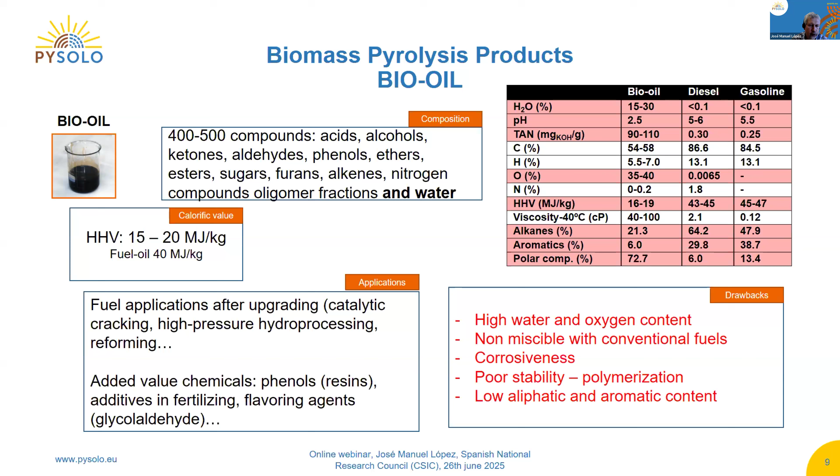But as the title of the presentation implies, to know the final application we need a deep characterization of these three products. I have here a list of different techniques that can be used for characterization, and I've also highlighted the PYSOLO capabilities.

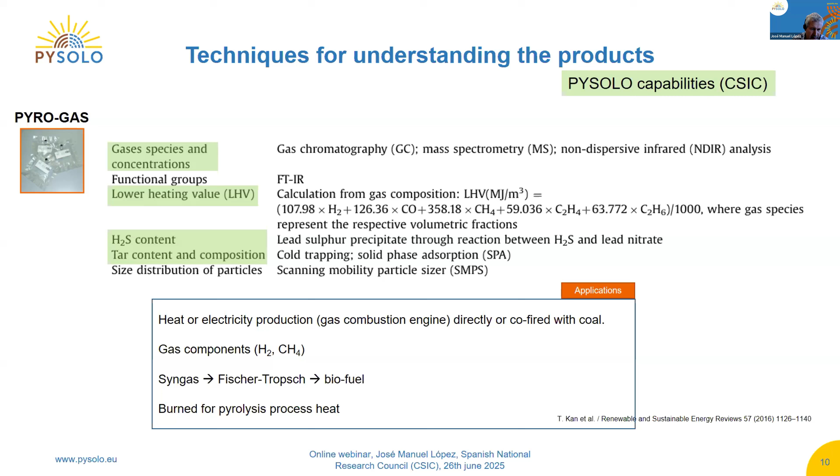For the gas, we can know the complete composition because we have gas chromatography coupled with TCD to analyze all the permanent gases and hydrocarbons in the pyrogas. From that composition, we can calculate the lower heating value. We can also analyze the sulfur content, not only in hydrogen sulfide form but also other compounds, for example hydrogen sulfide, carbonyl sulfide, methyl sulfide, and carbon disulfide. And we can analyze the permanent gases with a GC coupled with a TCD detector, and also light hydrocarbons up to C5.

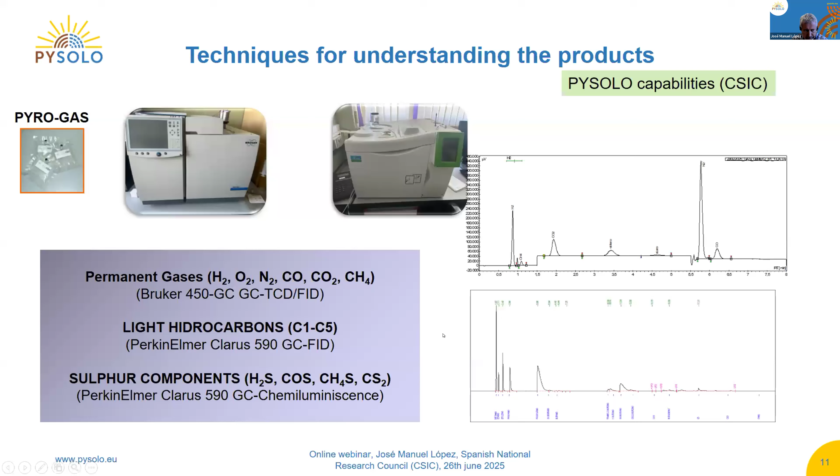In the case of bio oil, we can analyze a really big range of properties and compositions. We can analyze the water content, qualitatively and quantitatively identify the bio oil compounds, calculate different heating values, sulfur and elemental composition, and also the acid number, density, viscosity, and boiling range.

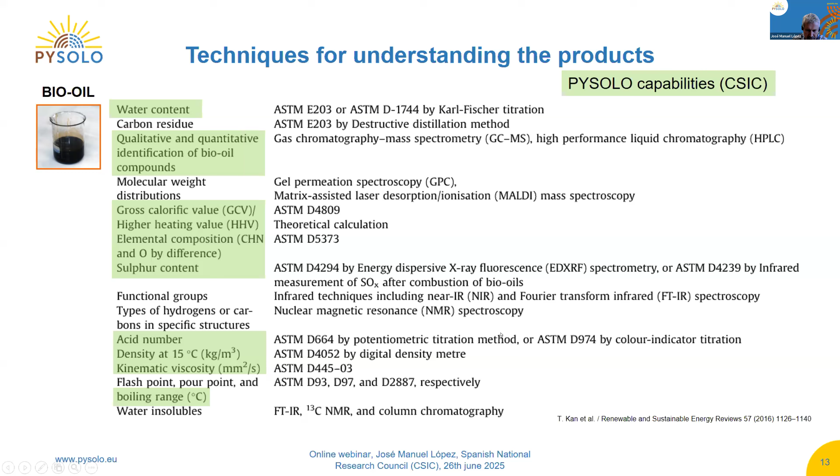As I said before, this is a big mixture of different organic compounds, up to 500 different compounds, and one of the most powerful techniques to analyze this bio oil is GCMS, gas chromatography coupled with mass spectrometry. We separate the different compounds through the capillary column and use the mass spectrometer to identify them, because each organic compound under the electron beam breaks bonds in a different pattern. So each compound has a fingerprint associated with it, allowing us to identify the compounds and allocate them into families, so we can know the composition in phenols, for example, cyclic hydrocarbons, acids, and other compounds.

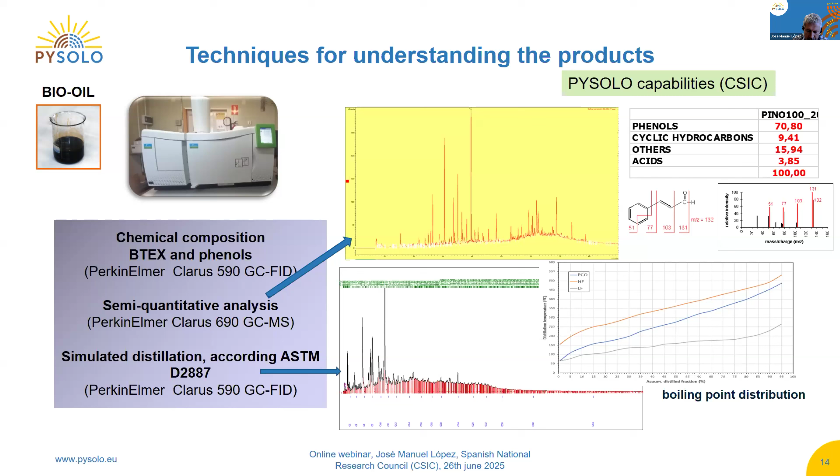Another powerful technique we have is simulated distillation. With just one injection in the gas chromatograph, we can extrapolate, using a calibration curve, the boiling point distribution of our bio oil. So we don't need to run a full distillation column to calculate the boiling point distribution, and we can compare it with conventional fuels like gasoline or diesel.

The main challenges, or why we need all these techniques, is because changing the pyrolysis variables, we are going to get different products and different composition in our bio-oil. That composition depends on the temperature, the flow rates, and the gas residence time. And also, the last challenge that we want to face is, as I said in the first presentation...

Two of the particle heat carriers that we are going to use, mainly calcium oxide and biochar, we have observed in previous projects and previous research that these solids can have a catalytic effect on the bio-oil properties. So we can run what we call an in situ upgrading of the bio-oil during the pyrolysis process.

For example, the calcium oxide has allowed us to increase the high heating value from 20 to 30 megajoules per kilogram. We can reduce the acidity of the bio-oil, and we can promote the deoxygenation rate by around 23%. And all of this is because calcium oxide can catalyze reactions like the dehydration and decarboxylation of the bio-oil components.

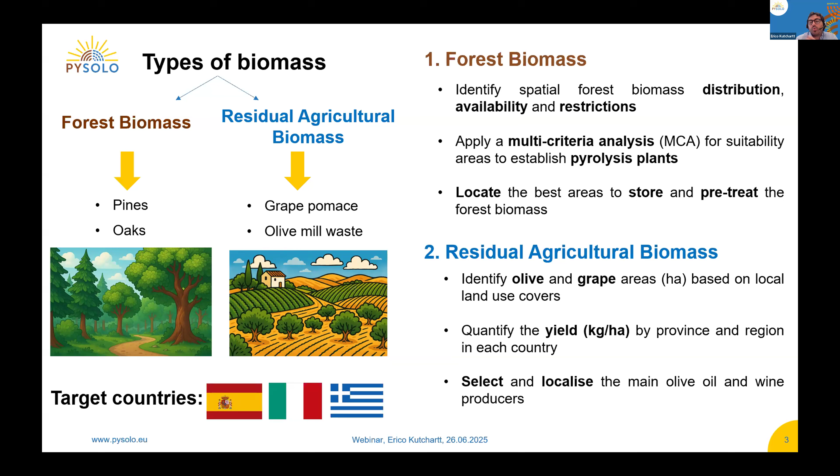And then the agricultural biomass is based mostly on two crops, which are olives that we use to produce olive oil, and grapes that we use to produce wine, and of course we produce residuals. We were quantifying these crops based on local land use covers, and it was very important to quantify, with the yield, how many kilograms we have per hectare annually. We have this information by province and region in each country. And then to localize this main crop, it's mostly tied to the producer - who are the main producers of olive oil and wine.

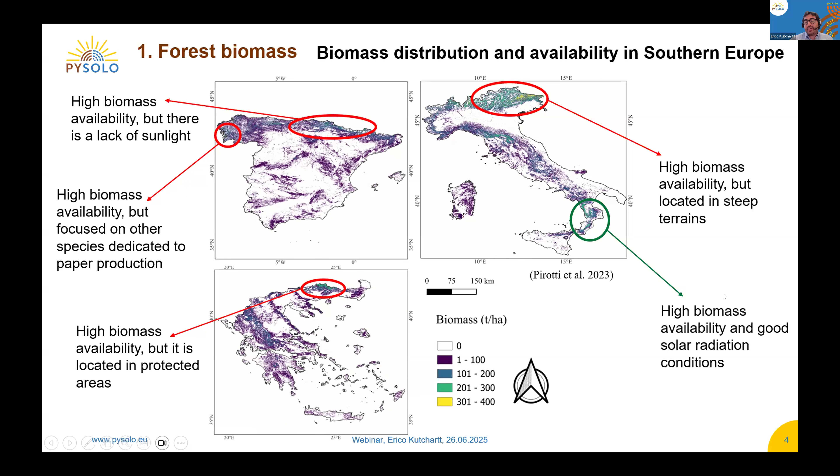And here in Italy, which is the country with the highest amount of biomass, this is between Trento and Bolzano, but it's steep terrain, very hard to mechanize the biomass. But here we have a good example in the south of Italy, where we have a good compromise between high biomass and good solar irradiation conditions.

This is how the DNI, the direct normal irradiation, is distributed among the countries. We have this table just to understand more or less the level, but at the end of the story, even if it's classified in these 6 classes, we were normalizing this variable, and the important thing was to discard areas with less than 1,000 kilowatt hours per meter square.

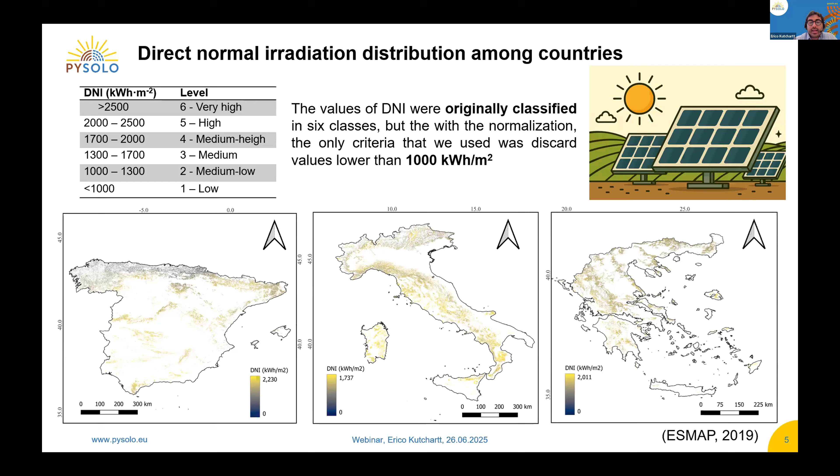This is our workflow that we were applying for forest biomass. First, we were using biomass maps, but we have different options from the European Space Agency. CTFC developed one biomass map using satellite data and artificial intelligence, but then you have all the biomass.

So we want to know only the forest biomass, not agriculture, not the grassland. So we select only forest areas. This was our output 1.

So once we have the total forest above ground biomass, we start applying restrictions. Why? Because, for example, about the topographical features, we have slope and elevation. So we have steep terrain, high elevation, which is very hard to mechanize to extract the biomass. We can do it, but it will be very expensive.

We have very low productivity and very high cost. Also, we cannot intervene in soils that are quite fragile, we cannot put any machinery, no harvester, no forwarder. Also the forest cover is important, because if we have, for example, 50% of forest cover and we are cutting more, we start to have degradation, plus the protected areas that I already mentioned.

So once we apply all these restrictions, we have our output 2, which is the effective forest above ground biomass that we apply in this multi-criteria analysis, in 2 main groups: vegetation and accessibility. In vegetation, we want to know the above ground biomass availability, the amount, but also productivity is very important.

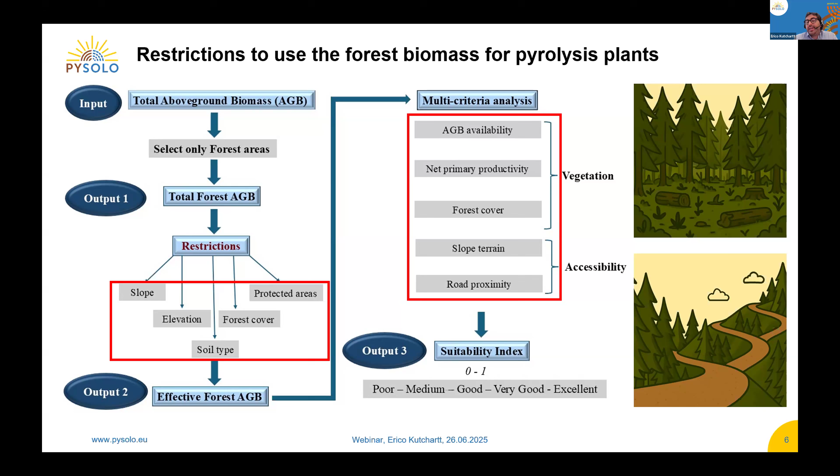So at the end of the story, output 3 is the suitability index, which is a value between 0 and 1, and we can divide it into quantiles from poor to excellent. This is an example.

For example, the biomass is in megagrams per hectare, forest cover is in percentage, and so on. So this variable we wanted to just transform to a 0 to 1 scale.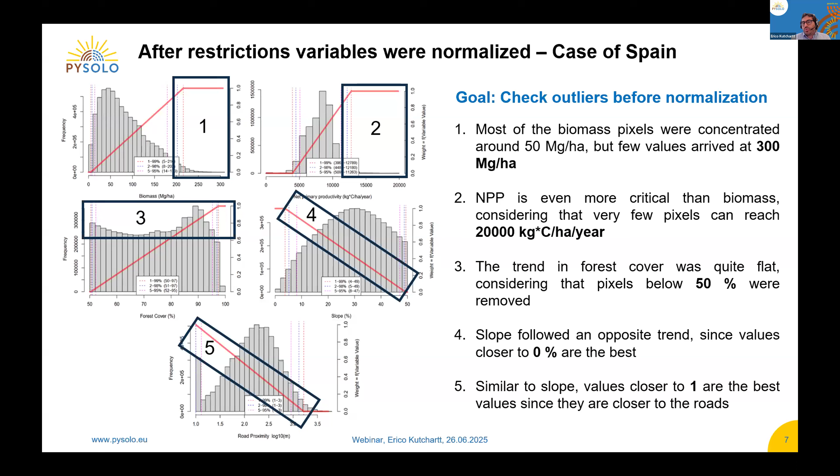So we create different scenarios, combining different weights, but before deciding this table with different weights, we apply sensitivity analysis. We were trying to compare two variables against each other and see how sensible one variable is against the other.

For example, between biomass and slope, the trends were quite flat, so slope was almost zero, meaning it's not really a key player. So we decided the slope would be fixed at 5% for all scenarios. Productivity also had very narrow variability, but then we identified high variability in biomass, forest cover, and road proximity. This is how we were playing with different scenarios.

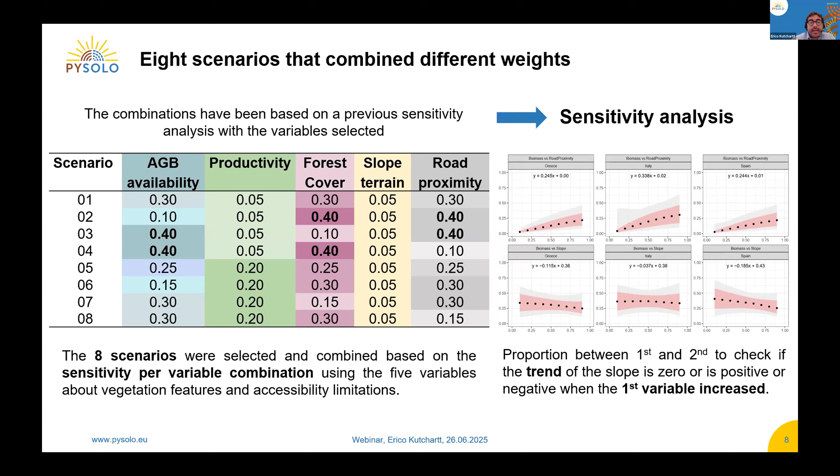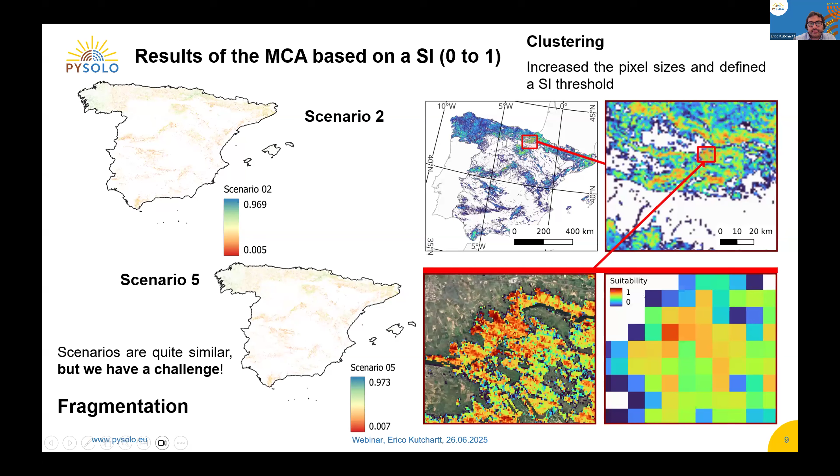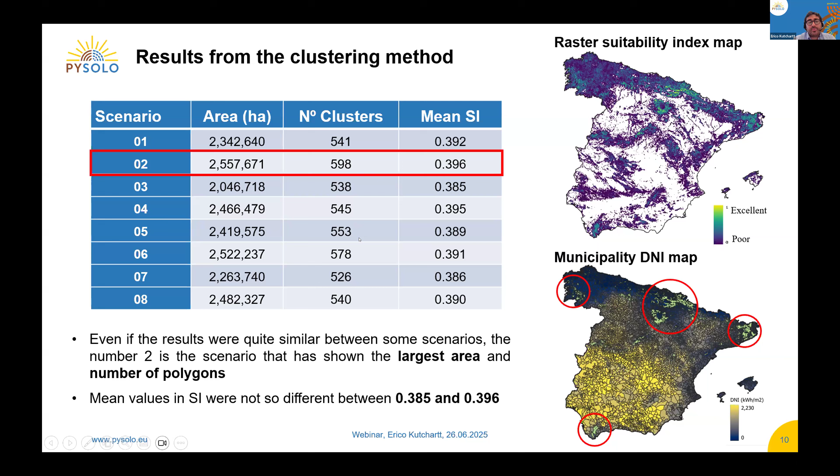So here are just vectorial layers we allocated to show this example, because the DNI we will use at the end of the methodology, which I'll explain soon. It's important to highlight that even when we play with different weights in the scenarios, the results were quite similar. There is some difference in the areas, but not too much in the mean suitability index and the number of clusters. The largest area was in scenario number 2, which we are highlighting here.

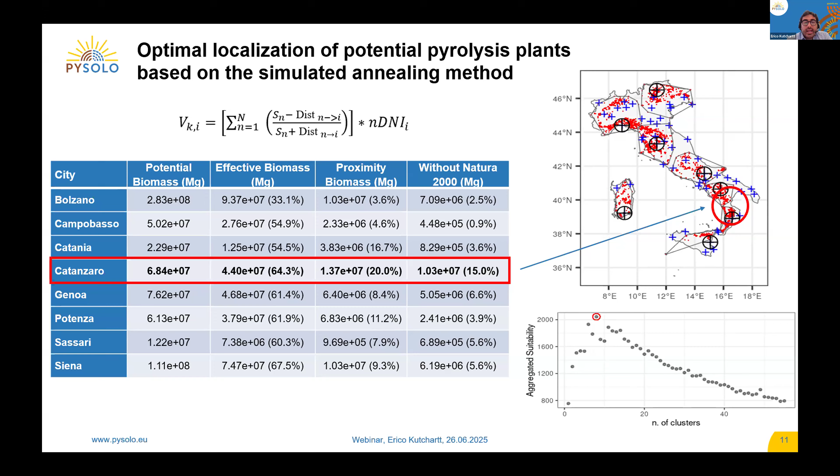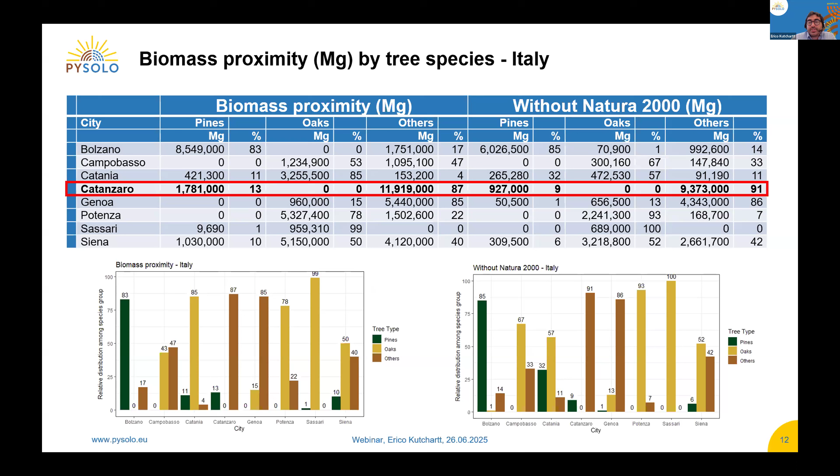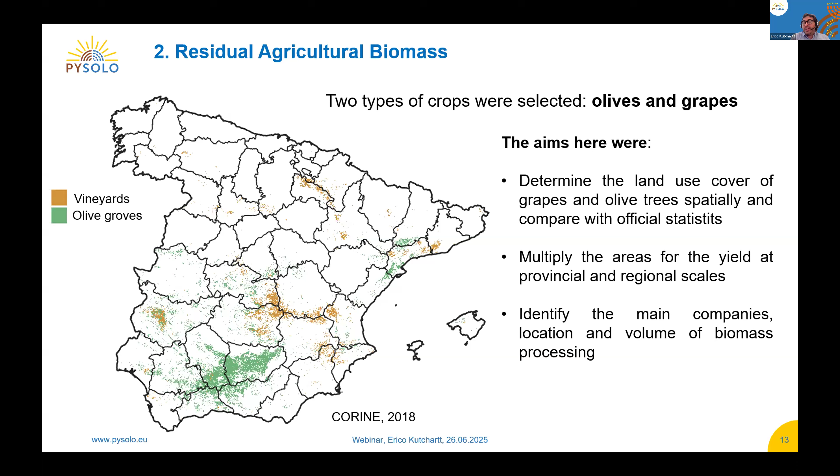So this is just an example. In the case of Spain, they have this local land use cover. For Italy and Greece, we're using CORINE, and those values are official. In Spain, it's the Ministerio de Agricultura, Pesca y Alimentación. In Italy, they have the Institute of Statistics. And in Greece, they have the Hellenic Statistical Authority of Agriculture. So those values are official.

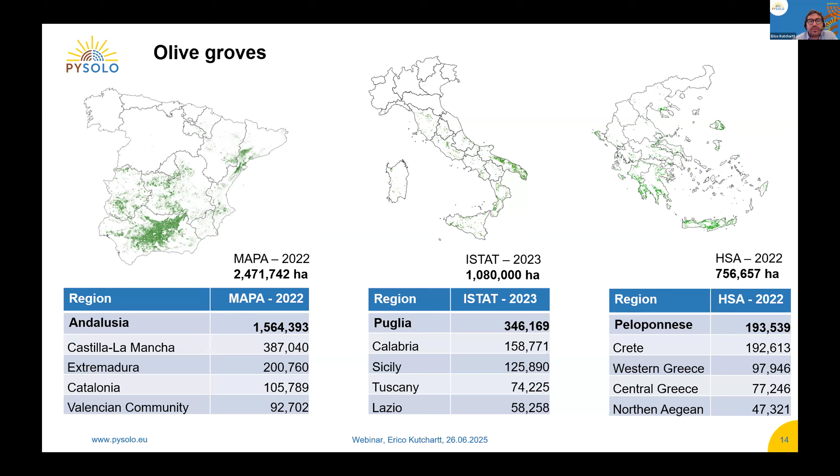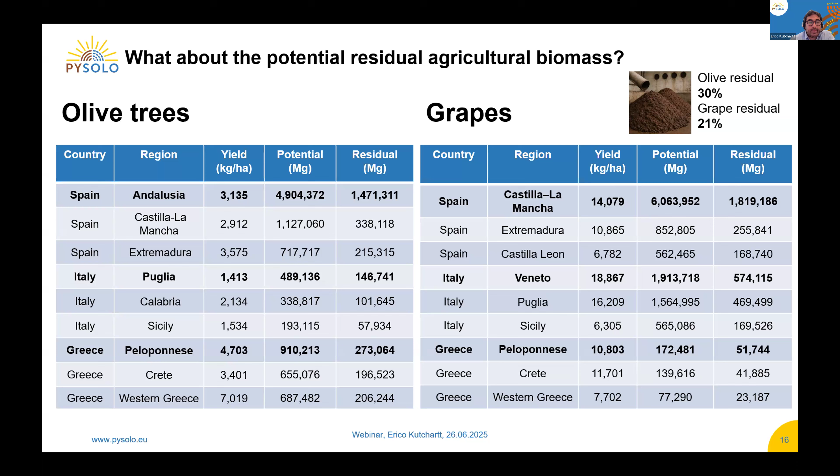So what about the potential of residual biomass? Here, we just multiply the areas shown in the previous slide by the yield, in kilograms per hectare, so we get the potential in megagrams. I changed the units just to remove the zeros. Then we apply a factor: 30% is what we expect to remain as residual in the case of olives, and 21% in the case of grapes. So these are more or less the values, and here we just selected the main three regions.

And this is an exercise. We know, for example, in Spain, Andalusia is the region with the main crop of olives, so where can we allocate the pyrolysis plant? Easy, we just need to identify where the main companies are.

But here we've got another challenge. There are a lot of associations and consortiums that provide you a list of companies, so you can see the address and localize them, but we don't know the volume these companies are processing annually. This is the challenge we are now dealing with. We've already written emails to the local ministry, and maybe we'll get some information.

If not, we can work with CORINE and also satellite data, because sometimes the address isn't really where they are processing the olives - they may just have a representation office in an urban area. So we need to select where they are located, if close to the crops, and decide accordingly. But it is much easier with agricultural biomass. It was not as challenging as with forest biomass, because here it's more flat and clearer where the crops are established. So this is just an example.

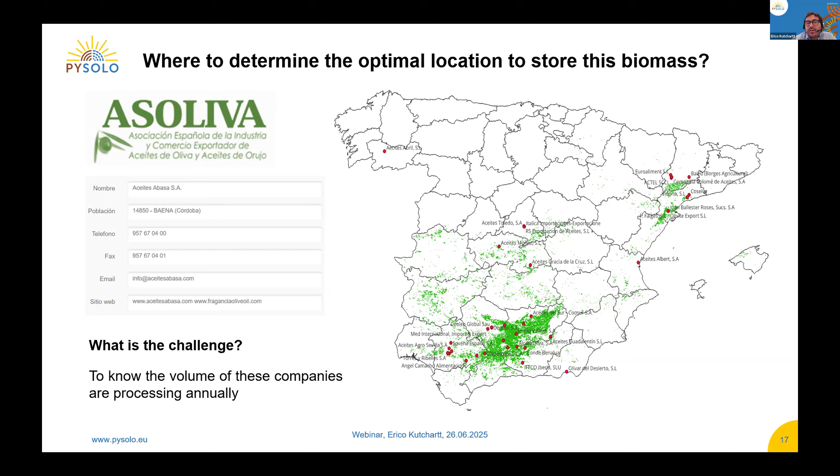We are doing the same with the vineyards for all the countries. So I think these were the final remarks.

Regarding forest biomass, we have high amounts of variables, but the problem is that high biomass areas are in areas with high moisture regime, which is logical. We also have restrictions regarding topography, soil, and vegetation features, and the suitability index obtained from the multi-criteria analysis improves when we define thresholds. When we applied normalization functions on all variables, establishing minimum and maximum, it improved the results a lot. And for the DNI, we integrate a DEM with the optimal location for the pyrolysis plant, but we discard areas less than 1,000.

In the case of residual agricultural biomass, the crops we selected are just olive and grape. We have more options - dry fruit and other kinds of crops - but we are focused on these two. To quantify, it was simple, just to know the yield and the area that official country sources provide. And to localize them, to stack this residual, it's important to identify the main companies that produce olive oil and wine.

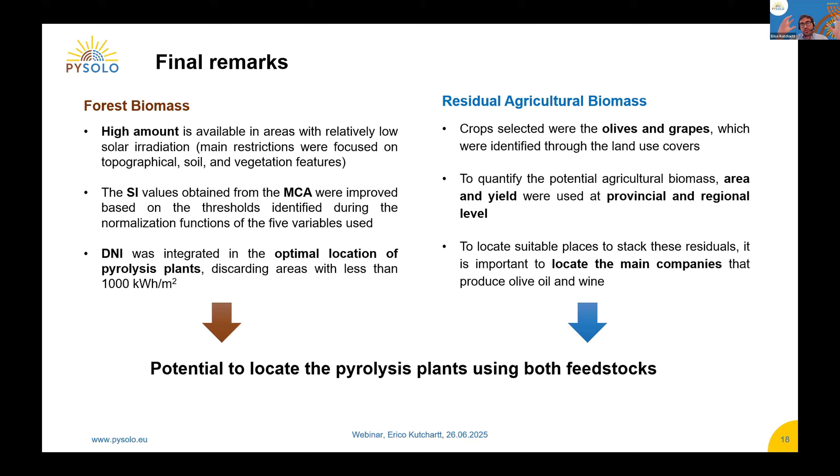So at the end, we want to merge this - the potential to locate the pyrolysis plant using these two sources of resources. And thank you for your attention. I am also open for questions, discussion.